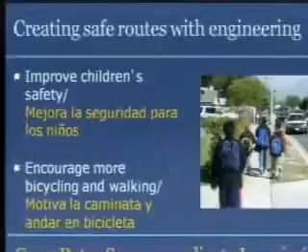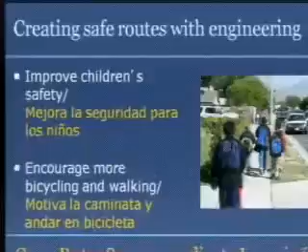You try to create safe routes with engineering to improve children's safety and encourage them to do more bicycling and walking. As you will probably recall, one of the major concerns that our residents listed when we were going through the master plan of trails and bikeways was that they just didn't feel safe in the sense of traffic speeds and crossing wide streets when they were thinking about whether or not this was a community they wanted to walk and bike in.

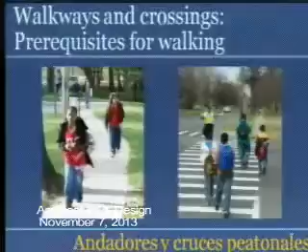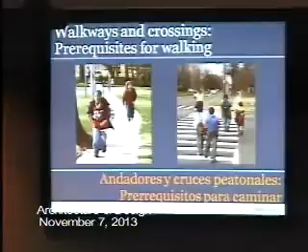So walkways and crossings, when it comes to school children, are absolutely necessary. You have to have these kinds of things in place so that, from a safety standpoint, they can walk. When the weather's bad, they still have a hard surface that they can walk on and they're not tromping through the mud. Part of what we do in master plan work for Safe Routes to School is to actually go out and look around each of the schools and see what the condition of these kinds of things are in that vicinity.

Bicycle lanes, of course, are very important to help encourage children to ride their bikes, as well as providing benefits to the community as a whole from additional bicycling.

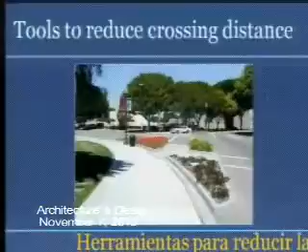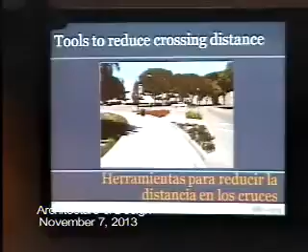We look to use things that can reduce the crossing distance on streets. You've already seen some of those things in our city where we've used bulb outs or other treatments, such as on 15th Street West near Kaiser, even over on Jackman, where even small improvements can make a difference in the crossing distance for someone who needs to get across the street. Probably the biggest example of that in our city so far is the work we did on the downtown boulevard, where it's now very easy to cross the street as opposed to what it was several years ago.

Curb extensions are certainly something that we're looking at doing, and in fact we're already installing them in some locations. They further help slow traffic speed and also reduce the crossing distance.

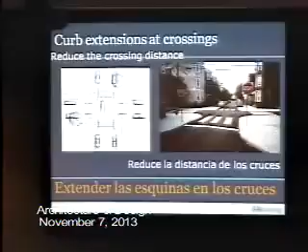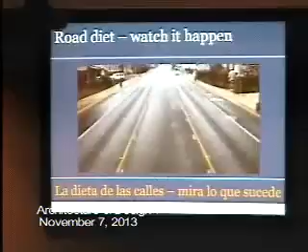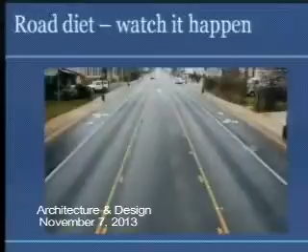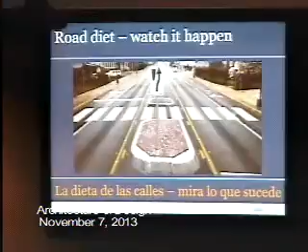Road diets, we've done some of these already. Michelle will give you some additional information on other ones we're looking to pursue in the near future. A road diet is really resizing the road so you still have adequate traffic flow, but you slow that traffic down and make it easier for bicyclists and safer for pedestrians to also use it. Crossing treatments, like areas of refuge for pedestrians so they only have to cross half a street at a time, can also be part of that.

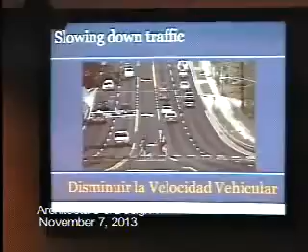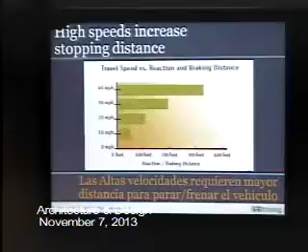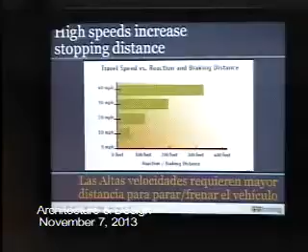The big thing is really to look at slowing down traffic, especially where you have school children crossing roads. The fact is that the higher the speed of traffic, the longer it takes a driver to stop a vehicle. At 40 miles an hour, the stopping distance is really the length of a football field, whereas at 20 miles an hour, they can stop in a third of that distance.

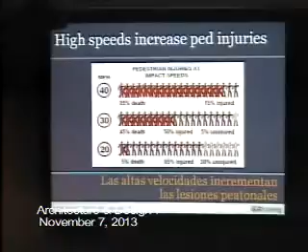The other thing is, if you're a pedestrian involved in a collision with a vehicle, if you're hit at 40 miles an hour, you are very likely to die—very unlikely to survive that. If you get hit at 20 miles an hour, you will still get injured, but you're very likely to survive that kind of collision.

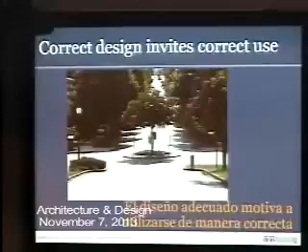We do believe, and this is something we learned a great deal about during the Master Plan of Trails and Bikeways effort, that correct design of streets really invites correct use. If you design the street to control the speed, that's the speed you'll get most drivers to drive. Our downtown street is a good example of that.

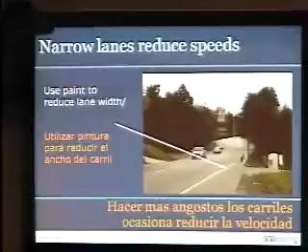Narrowing lanes reduces speeds. It doesn't have to be physical—it can be done with lines. We've had some success with that in some areas already.

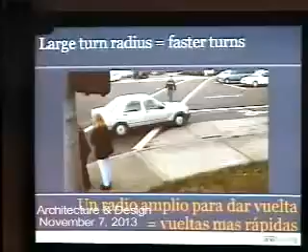Turn radiuses, or how wide the corners are, matter too. Larger turn radiuses make it easier for drivers to make rapid right turns, and you really want a situation where they have to go more slowly. It allows them to see pedestrians in time, and gives people crossing a shorter distance, because a smaller radius actually extends further into the intersection and allows a shorter crossing time.

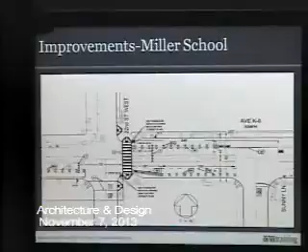Here are some improvements that we have already underway, and you may have seen some of these happening near Miller School, which is at 20th Street West and Avenue K4. This is actually an improvement we're looking for curb extensions on Avenue K8, about a quarter mile south of there. That work is already underway.

This one is at the intersection of K4 and 20th Street West. This is 20th right here, and north, to the left. What we're going to be doing here is providing, once again, some extension of the curbs as well as the installation of a traffic signal so that children don't have to cross an uncontrolled intersection. We feel that's going to bring some additional benefit to this school.

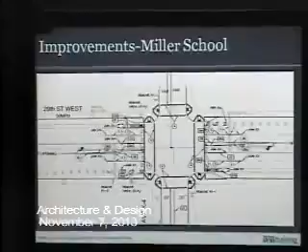We were able to tell some of the school staff and parents this when we did the walk audit at Miller, and they were really ecstatic. Everything we did after that was just great. They loved the fact that this was already going on.

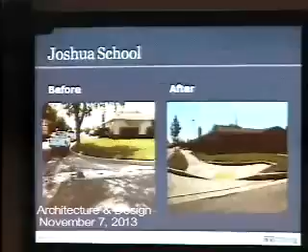We have done some improvements around Joshua School. This was a case where walkways and sidewalks and paths are important, and there were none in portions of that area. We've now managed to install those sidewalks and ramps so that there's an easier opportunity for children to walk in those areas.

That's my part of this presentation, giving you an idea of the kinds of things we're thinking about on Safe Routes to School. Michelle is going to give you an update on some of the improvements we're already looking at doing around some of our schools. Then Elma Watson, the project manager for the Safe Routes to School effort, will give a brief summary of what we've done so far and what we're looking at doing in the future. Thank you very much for your time.

Thank you, Brian. Good evening, Commissioners. Brian has discussed some of the tools we're looking at implementing around schools to help improve safety, but they can also be applied at other locations throughout the city, not necessarily near schools, but really everywhere, and that's really what we're looking to do.

One of the tools he briefly mentioned were roundabouts, so this first part of my presentation I'm going to talk about the benefits of roundabouts and why we're considering them at three locations throughout the city, two of which are close to schools, the other on the way to school but probably more like a mile or so away. We really think they're a safer choice for intersections, and let me explain why.

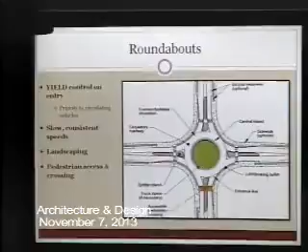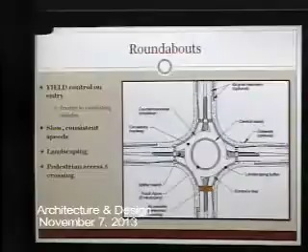Pedestrian access crossings occur away from the intersection, not too far, but back from it. You don't cross across the circle, you cross at the crosswalks, and the crossings are much shorter than at a traditional intersection. You usually cross one leg at a time, meaning you're only crossing one direction of traffic at a time — you look left, get to the splitter island, then look right and continue on. So much shorter crossing lengths and less exposure to traffic.

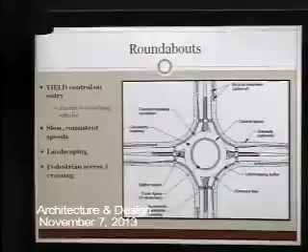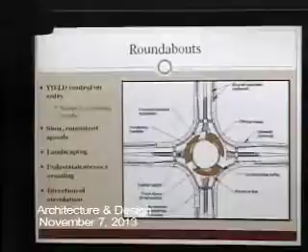And then the last feature is the direction of the circulation, which is always counterclockwise. Some people are concerned that they might not know how to maneuver through a roundabout, but the splitter island, the markings on the pavement, and signs will help people understand what direction to go and how to make those movements.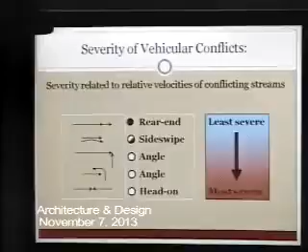This slide speaks to the severity of collisions we have at both traditional intersections and roundabouts. Typically we have rear end, side swipe, broadside, and head-on collisions. The most severe are head-on and broadside or angular type collisions. Here in the city of Lancaster we have high speeds, so when those accidents occur they happen at high energy, high impact, and typically result in more severe injuries. But with a roundabout, it pretty much eliminates the potential for head-on or right-angle collisions. You typically see more of the less severe rear ends and side swipes, and because they happen at 20 to 25 miles an hour, they're definitely less severe.

This slide shows the number of conflict points you might have at a traditional intersection: there's 32 conflict points versus 8 in a roundabout, so it's reduced by 75%. The traditional intersection typically has higher speeds, higher angle, and higher energy collisions, whereas in a roundabout they happen at lower speeds, low angle, and low energy. Because of the design of a roundabout, there's typically 90% fewer fatalities than at a traditional intersection, a 76% reduction in injury-related collisions, and a 35% overall reduction in collisions.

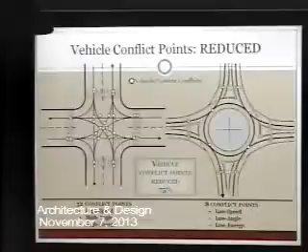Similarly for pedestrians, the number of conflict points is greatly reduced by 50%. The crossing distances are much shorter—you're only looking at one lane of traffic at a time instead of multiple lanes. At traditional intersections, drivers have to make a lot of decisions: whether to turn left, looking for oncoming traffic, looking up at the signal, or looking right or left to make those turning movements. They're not necessarily looking for pedestrians who could be on the sidewalk. So with roundabouts, there's less time that the pedestrian is exposed to traffic, and for shorter distances.

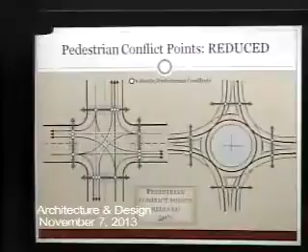Okay, so now I'd like to show you some of the locations we have planned for roundabouts.

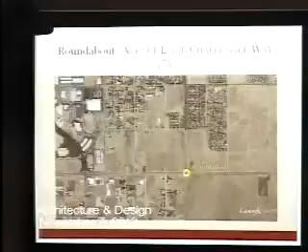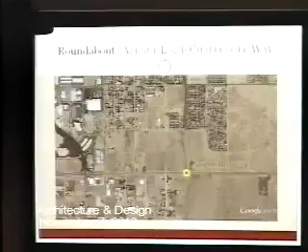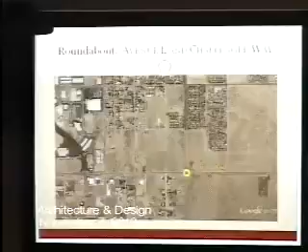The first is at Avenue L and Challenger Way. We considered a roundabout here because in the last 10 years we've had 4 fatal collisions at this intersection. That's pretty significant—in fact it's the intersection with the highest fatalities for the city. So we applied for a grant through the Highway Safety Improvement Program and were awarded grant money to install a roundabout. We're hoping to reduce those severe collisions, the broadsides and right-angle collisions that occur because people run the traffic signal. With the roundabout at this location, we're hoping to slow traffic down as it approaches and gets through the intersection, eliminating those types of collisions altogether.

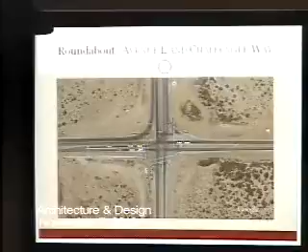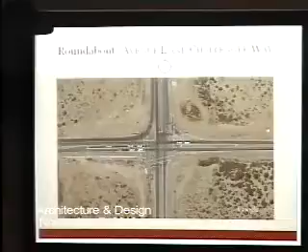This is a picture of the intersection today. There's 4 lanes in the west leg, 4 lanes in the northerly leg, 2 in the easterly leg, and I think 3 in the southerly leg. When we do the roundabout, we're going to reduce the number of lanes approaching the intersection to 1 in each direction. It's probably hard to see, but this is a concept of what the roundabout will look like. You can see the angles approaching the intersection, meant to slow the traffic down so it can't go any faster than 25 miles an hour.

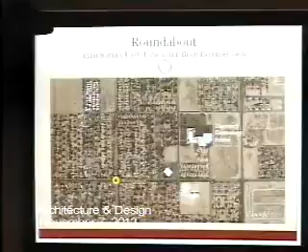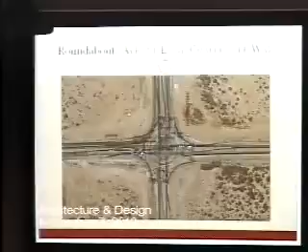The next location—let me back up for a minute. Just so you know, this intersection is actually almost designed, it's 90% complete, and we hope to advertise it for construction at the beginning of next year and start construction in spring.

So the second roundabout we're looking at is at 15th Street East and Lancaster Boulevard, near Discovery Elementary School.

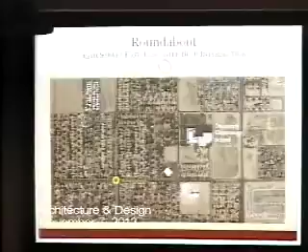Currently, there are 4 lanes in each direction, and the intersection is actually pretty wide, 78 feet. A school-age pedestrian typically walks at 3.5 feet per second, which means pedestrians are exposed to traffic for 22 seconds crossing 5 lanes of traffic in just one direction. So there's a lot of time where there's potential for a collision with a pedestrian.

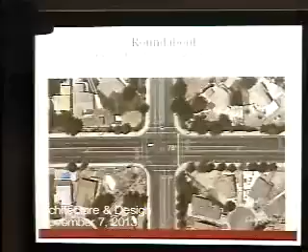Currently, it's an all-way stop intersection, and there's been a history of failure to stop, which is the primary cause of collisions. Those tend to be right-angle, high-energy, high-impact collisions. The sheriffs have issued over 40 tickets so far this year for failure to stop at the intersection, so it's been a compliance issue.

So that is the primary purpose we started looking at a roundabout at this intersection. We want to improve the safety here and improve the crossing for the school children as well.

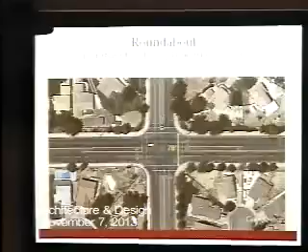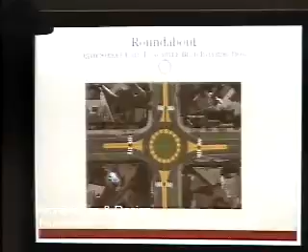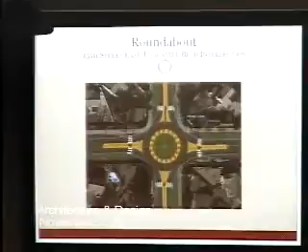This is the concept of what the roundabout could look like at that intersection. As you can see, we're going to give this street a road diet, so there will only be 2 lanes at each approach. School kids will now only cross 15 feet at a time, instead of 78 feet, meaning they're exposed to traffic for only 4 seconds at a time, instead of 22 seconds.

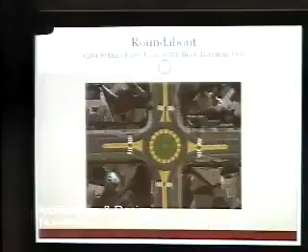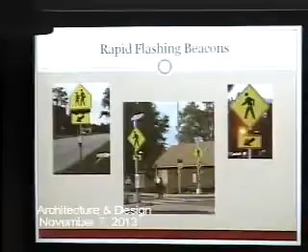In addition, we're proposing to install rapid flashing beacons at the crossings. They're pedestrian activated, so you approach the intersection, push a button, and the lights flash back and forth kind of like a wigwag, really bringing attention to the approaching motorist that they need to yield to a pedestrian who's there.

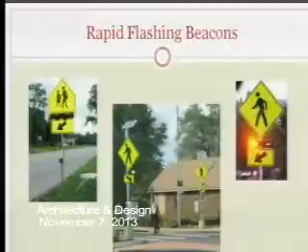I mentioned the road diet, so we'll be dieting the road from 17th Street East to 12th Street East, taking it to 1 lane in each direction and adding bike lanes. This will also enhance the intersection at 17th Street East, which is a school crossing. The distances will be shorter, and we'll also be installing rapid flashing beacons there as well.

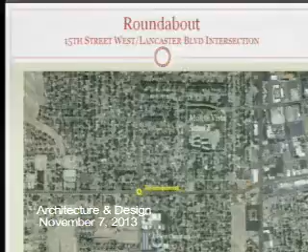The third location we have planned for a roundabout is at 15th Street West and Lancaster Boulevard. Again, the intersection is very similar to the one we just looked at, except this one is signalized. The crossing distance is very long, and pedestrians are exposed to traffic for much longer times and in a lot of different directions.

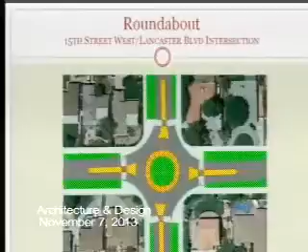This is a conceptual of what the roundabout could look like — much shorter crossings, a more enhanced, pleasing-looking intersection, and much slower speeds. We're really looking for that improved safety. Since it was a signalized intersection, the main cause of collisions was failure to stop at the signal, resulting in broadside, high-impact, severe collisions.

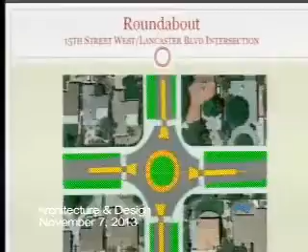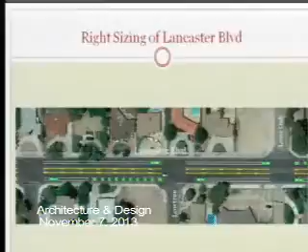In addition to the roundabout, we'll be giving Lancaster Boulevard a road diet from 10th Street West all the way to Valley Central Way. This just shows one segment of that. We'll be adding wider bike lanes enhanced with green pavement at conflict points. We'll also be reintroducing on-street parking on Lancaster Boulevard to help reclaim that neighborhood for the people who front on that street, and the crossing at 12th Street will be enhanced significantly.

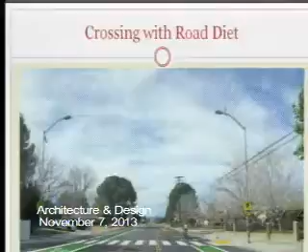This exhibit shows what it looks like today on Lancaster Boulevard, and here's what it'll look like with the road diet and the restriping. And here's that crossing where we're actually going to add a median refuge, as well as the rectangular rapid flashing beacons.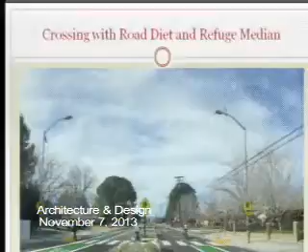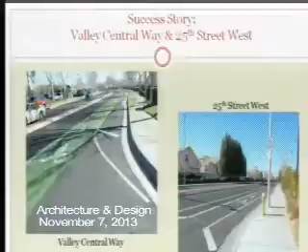On Valley Central, yes — can I ask a question? On Valley Central Way, why did they put the bike lane on the other side of the buffer? Yeah, I was just getting ready to explain that. Okay, no, that's okay.

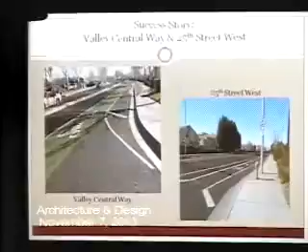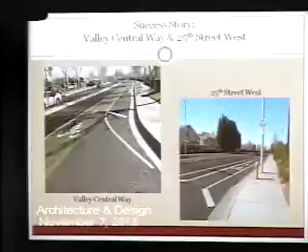That's a great question. The reason we did that is because we really had some issues at the driveways along Valley Central Way, so we wanted to provide an 8-foot wide shoulder for cars to be able to improve their line of sight, the view they have of oncoming traffic. We didn't want that to be right in the middle of a bike lane, because you don't want a bike lane to have to stop just because somebody's trying to edge their nose out into the street. Speeds were also slower on Valley Central Way, and that's why we put the bike lane on that side and why the shoulder is there, again to improve that vision from the driveways. By doing that, we've really seen a significant improvement.

So both on Valley Central Way and on 25th Street West, speeds have been reduced by 5 miles per hour. And the volumes on Valley Central Way have actually increased, where the owner of that commercial center was really concerned that taking away a lane of traffic would impact getting as many cars on the street. In fact, that's not the case. Volumes have actually increased on Valley Central Way.

Now they decreased on 25th Street West, which isn't bad because that's kind of the backs of the businesses. It wasn't a significant decrease, but perhaps the road diet discouraged people from going down the road.

I'm not sure. But the biggest impact we've had is mid-block collisions - meaning collisions at all the driveways or intermediate intersections, not including Avenue J or Lancaster Boulevard. They've decreased by 67% on Valley Central Way and by 50% on 25th Street West. And at the driveways where we were really trying to improve safety, there have been no reported collisions.

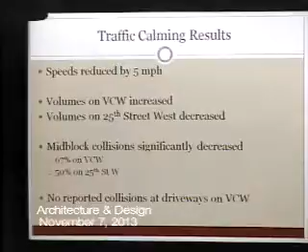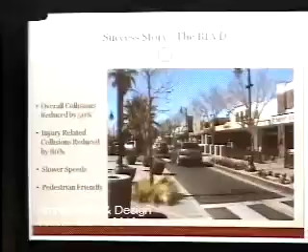Of course, the Boulevard has been a great success story, on Lancaster Boulevard between 10th Street West and Sierra Highway. These numbers actually include the intersections of Sierra Highway and 10th Street West, so this is actually really significant.

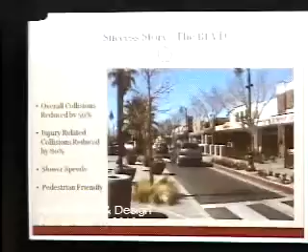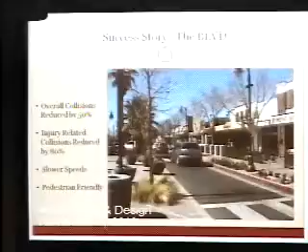Overall collisions have reduced by 50%, and injury-related collisions have reduced by 80%. Of course, we have slower speeds, only 15 miles per hour, and the street is much more pedestrian-friendly, walkable, and much safer for everyone.

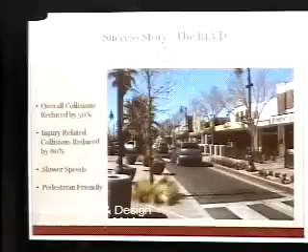So that concludes my portion of the presentation, and I think at this time, Alma's going to talk to you about the current Safe Routes to School program and the status.

Thank you. That's all great news that you just gave us. Thank you.

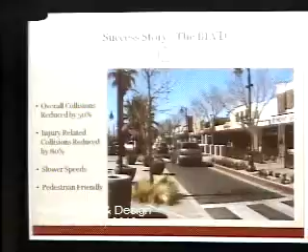Thank you. Good evening. Sorry, no PowerPoint.

Of course, the City of Lancaster partnered again with Antelope Valley Partners for Health, and we received that competitive grant from LA County, funded by the Center for Disease Control. We were really thrilled to partner with them, and now we're working with 4 school districts, including Lancaster School District, Antelope Valley Union High School District, East Side, and West Side. We've reached out to them, and everyone is on board - a huge success in our initial reach out.

The grant is 4 years, and the first year was cut a little short. We only had several months to deal with, but we got a lot accomplished. We reached out to the districts, everyone's on board, and we created a strong technical advisory commission. We launched a website on the city's webpage, and we participated in National Walk to School Day, and the City Council issued a proclamation for October, Walktober, which was pretty cool.

During the first term, we worked with 6 schools: El Dorado, Lincoln, Linda Verde, Miller, Paiute, and West Wind. At those 6 schools, they all participated in their back-to-school nights. We also conducted the walk audits that Brian was talking about earlier - the education and engineering portion.